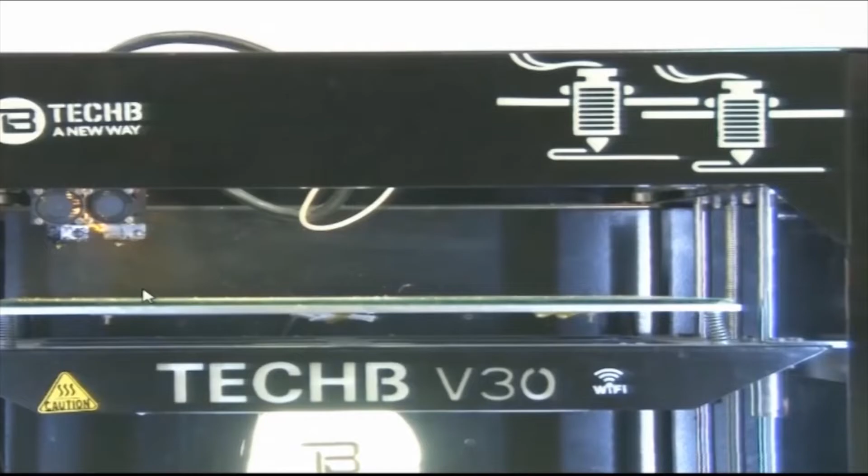In this lecture, we'll take you to the lab for the laboratory demonstration. Now, this process is known as parking. We are parking, like car parking, kind of homing. It is parking the head at the left side, left corner of the machine.

Now, after setting the G code and making all these settings, we are here to prepare the bed for machining, okay, to prepare the bed and to set up all the things like spool, filament. We'll induce filament through the rollers that would come through the extruder, and we'll try to see whether it comes properly or not.

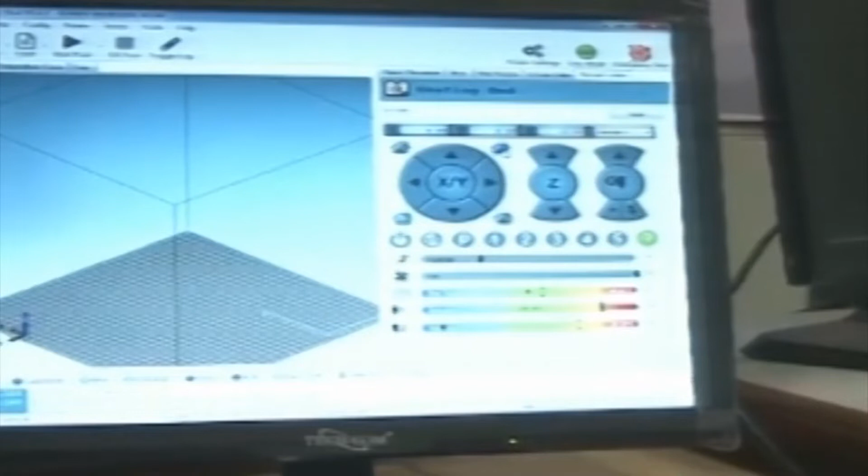Before that, the heating that was done with the commands that we gave is there. The bed is getting hot, it has come close to the temperature that was given, 55 degrees, and the nozzles are close to 230 degrees. So, the temperature is trying to come to this desired input, 230 degrees for the nozzle, 55 degrees for the bed. It will take about 15 minutes. By that time we can prepare the bed.

So, let us start the cleaning and loading and unloading of the material. This is the cutter that is used to cut the filament, if required. This is the tube through which the filament would come through. It provides a proper path to the filament. This tube is attached to the filament head. This is a spatula, which will be used to clean the bed.

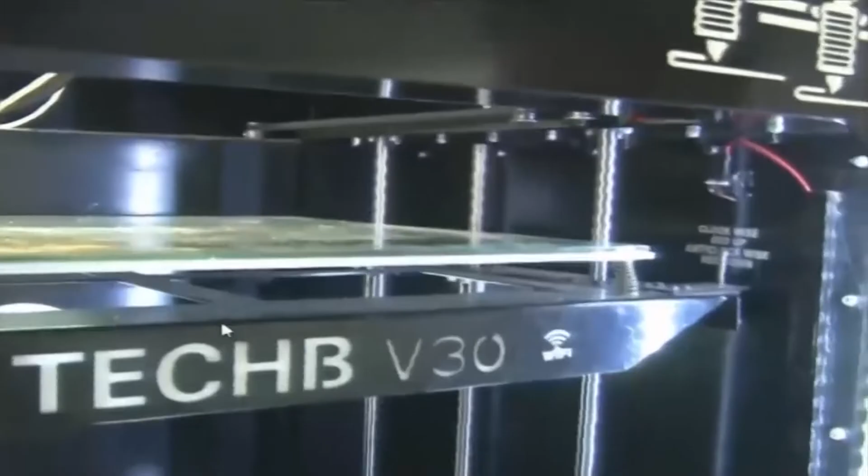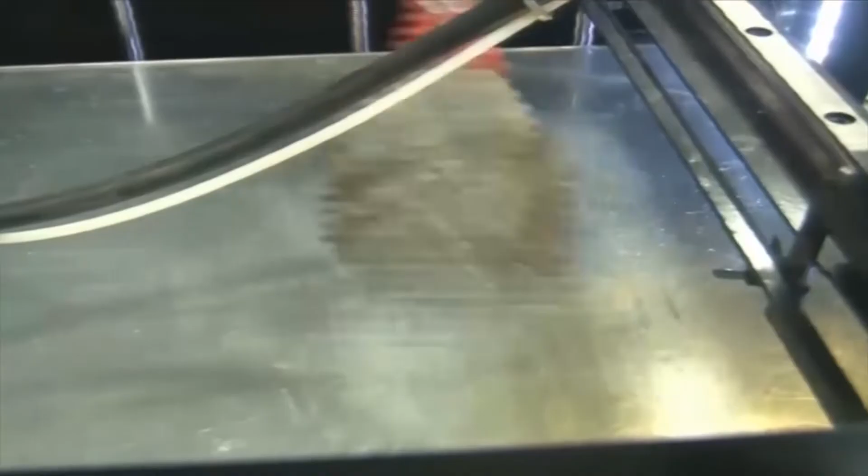So, this is distilled water with a few drops of some cleansing agent. Some of the liquid cleaner is sprayed and it is cleaned with the help of the spatula. The whole machine bed here is actually glass, so we have to be careful.

So, what is this white milky material? It is nothing but Fevicol, the adhesive material we have used. So, we are again applying some more Fevicol. It will help to lock the first layer.

As we said before, we have put our CAD at the center of the envelope. That is why we are preparing the portion that is at the center. So, a thin coat of Fevicol is applied at the center.

Now, this is our head, and there are heaters here that are heating the filament. The filament is coming through this white tube. This is the head that can be moved, so this is our X and Y movement. For the Z movement, the bed is moving up and down; that movement is controlled with the bed.

And there are two nozzles here. Only one nozzle is active at this point of time. So, let us see how to load and unload the filament. This black portion is a PU connector. The PU connector can be screwed in and out.

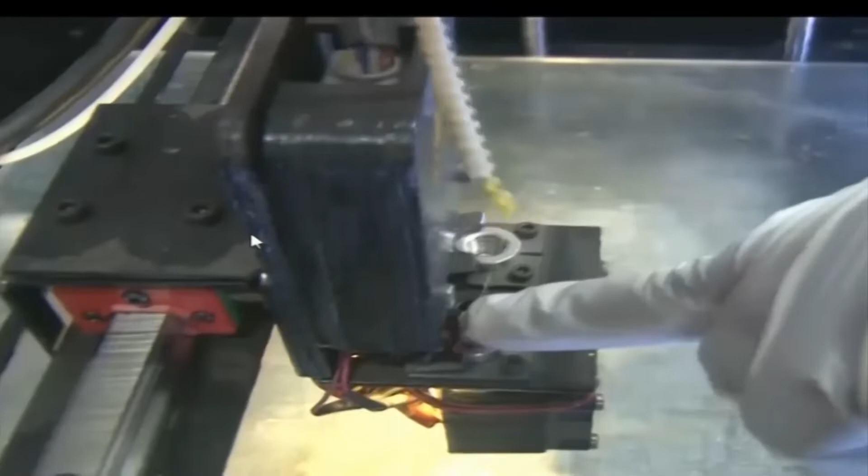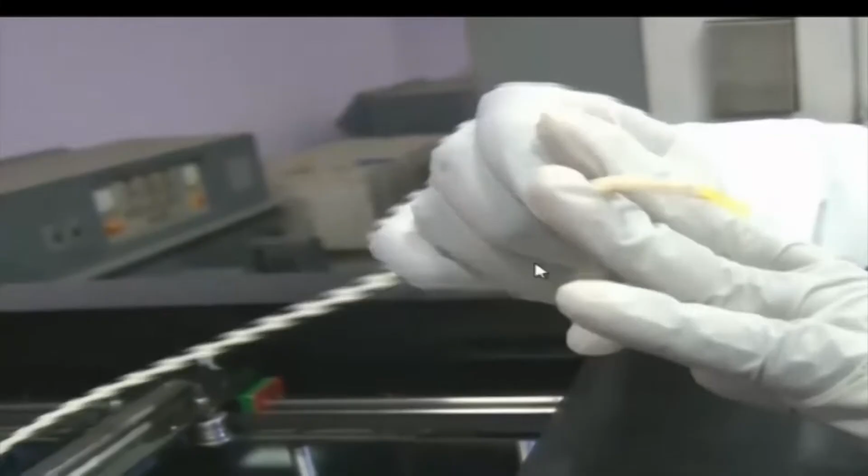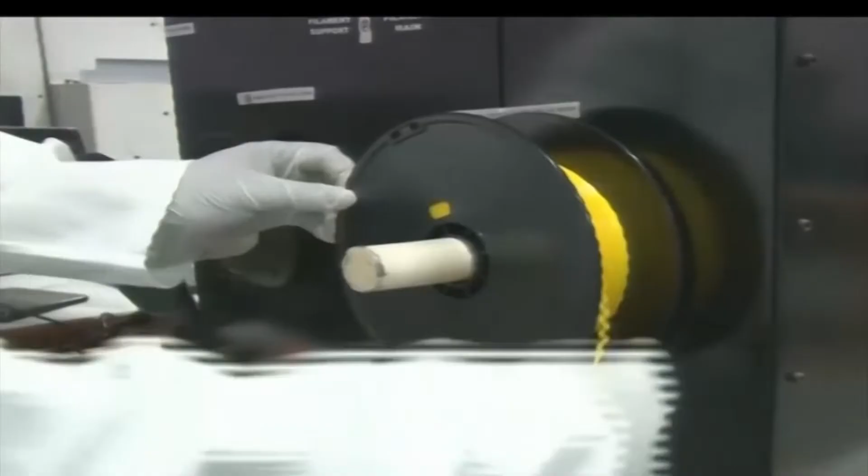So, we have unscrewed it. The PU connector is according to the size of the tube, so the tube would exactly fit into it. These are our rollers; we are taking it off, we are unloading the filament now, you can see. Again, this is the filament of size 1.75 mm.

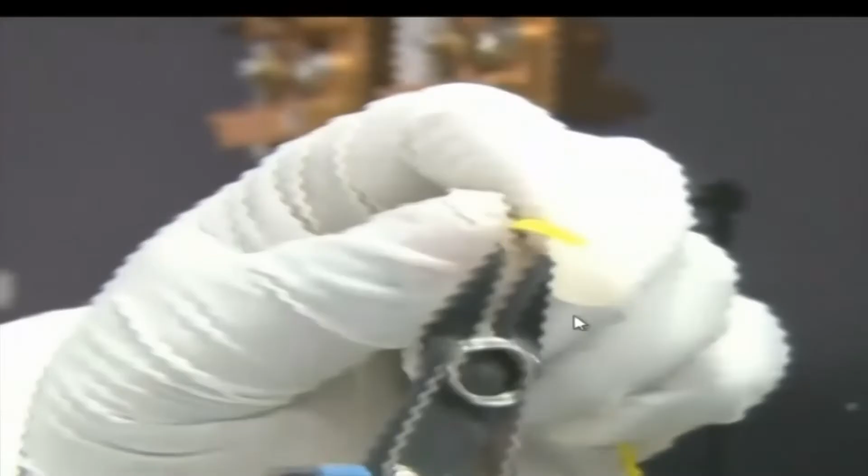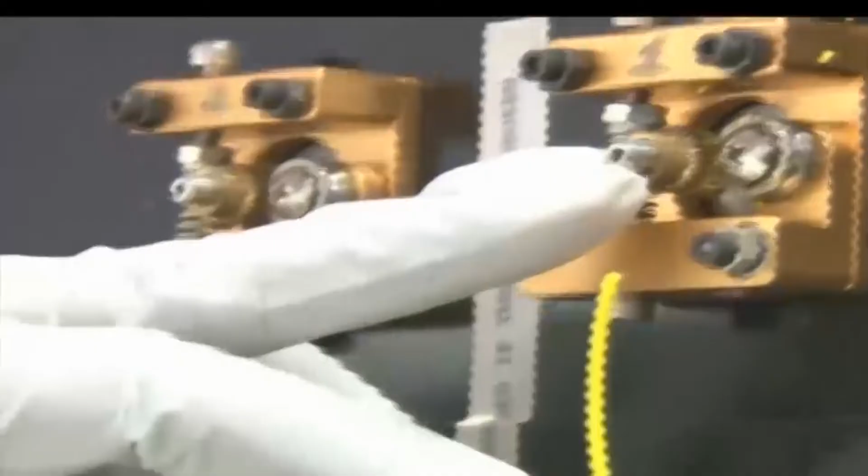Now we can see that the filament is a little distorted at the tip, so it wouldn't enter the rollers properly. The end of the filament is not proper, so we are going to cut it. We have cut it, so it is now flat or square at the end. So this is the roller. This would help to take the filament forward. When this rotates, the filament is carried forward in this upward direction.

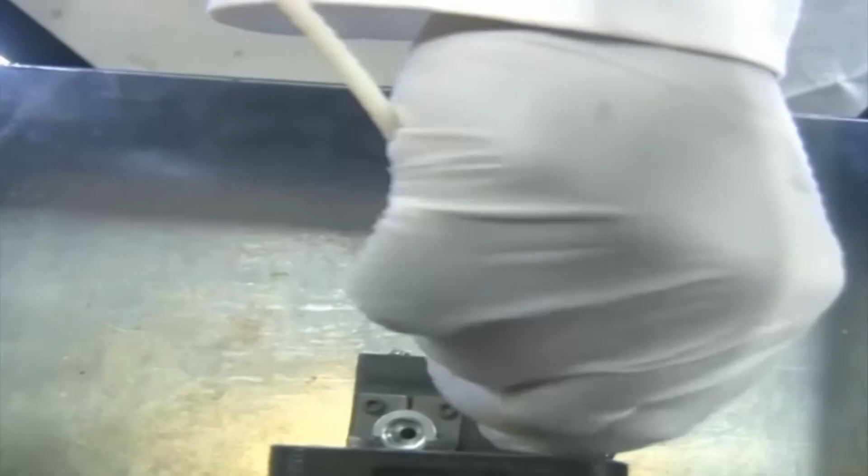Now we are entering the filament into the tube that is connected to the PU connector, and this tube is also according to the diameter of the filament: 1.75 plus allowance, 1.85 mm inner diameter. Now this PU support tube, the filament support tube, is connected to the PU connector.

Now we will see whether it is working properly or not. Now we will lock the PU connector. We have locked the PU connector here. This roller that I mentioned, responsible for feeding, is also known as the feeder. So we are using this pulley and feeder: two rollers, one roller is the pulley, another roller is the feeder.

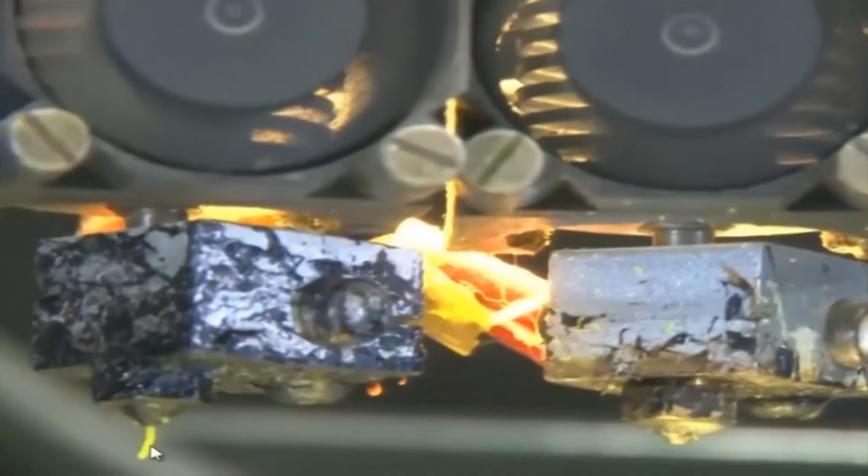We can see that loading of filament is properly done. Now we can see whether the filament is coming through the nozzle or not. Yes, it is coming. Now this means the temperature is now maintained.

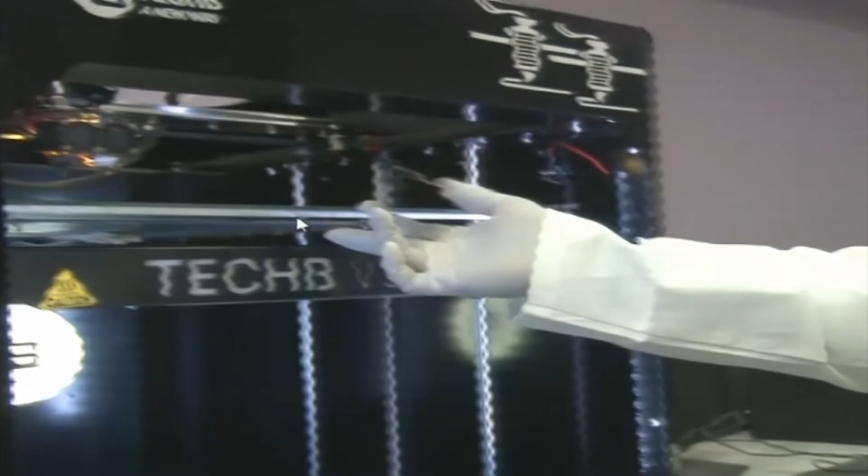Now we will use these two clips to hold the glass with the bed, with the table bed. Okay. So this bed is at the temperature of 50 to 55 degrees centigrade. So to hold them, we use these two clips. We will put clips here and here so that it gets properly over here and at the other diagonal end. Okay, so where are the heaters for the bed?

Now we can go at the bottom of the bed. Let me try. Camera would go at the bottom of the bed. This is the bottom of the bed. There are heaters here. We can see there are heaters attached here. Okay, and the base is aluminium. This bed base is aluminium. There are heaters there, and on the top of the aluminium base, we have put a glass plate on which the actual fabrication would take place.

So one clip is put here, another clip is put on the other side. So everything is in its place now. The temperatures are like we see, filament was coming out of the nozzle. The temperature is close to what we require. Close to means if we have input 230 degrees centigrade, as we know it wouldn't be exactly 230 degrees centigrade all the time. It might vary like 2-3 degrees or 5 degrees variation. But yes, that is the working temperature.

The temperatures are set 230 degrees centigrade for filament, 50 to 55 degrees for table. The loading of the material is there. The rollers are engaged. The two rollers means one is the pulley and the feeder is engaged. Filament is coming properly. The bed is prepared. We have applied Fevistik to make sure that the material sticks there, and the cleaning of the bed is done.

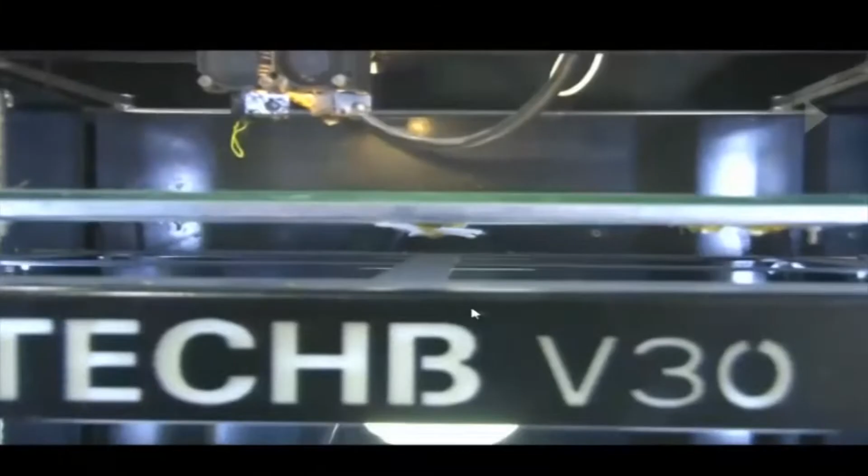So before print preview, we'll just come to manual control here. In manual control, we are going to check manually whether the things are moving. Oh, yes, we are checking the material is coming in, material is coming out. You can see the material is coming out. So we are manually checking whether the feeder is working or not. Okay. So the material is coming out. The extruder is being checked here for its proper setting.

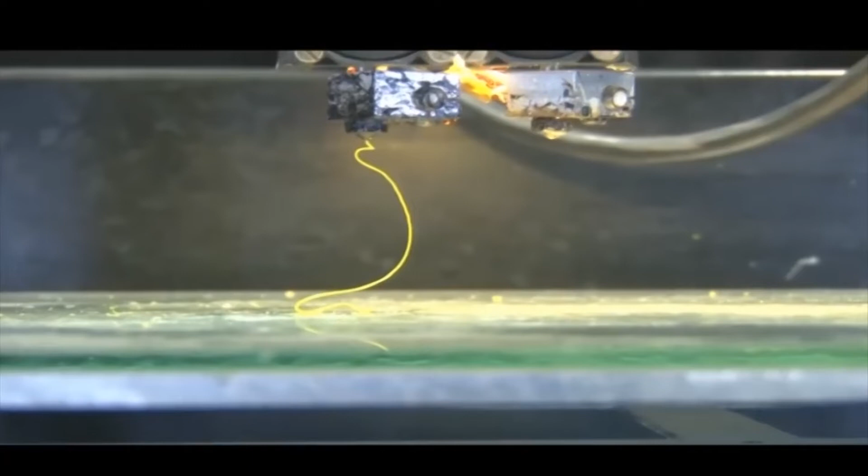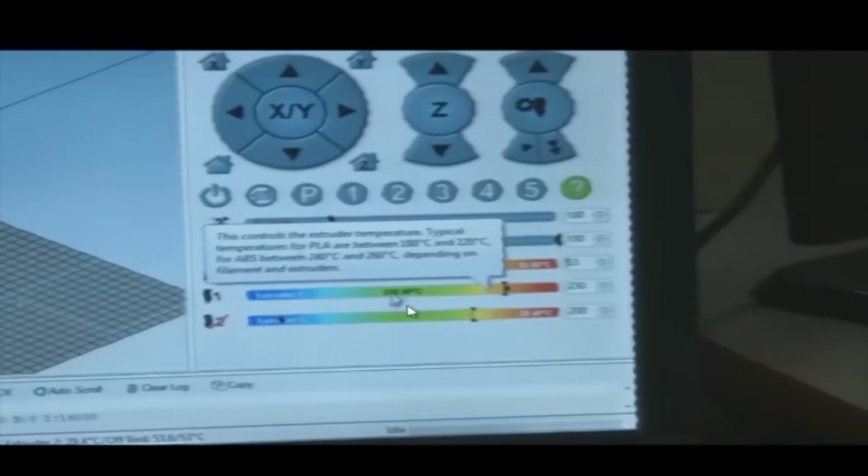Again we can see extruder is activated. In this way we check that everything is quite well or not. Now the temperature is actually 53, 230 degree. Yes, the temperature is 230 degrees for the extruder 1, 53.6 degrees is for the bed. Yes, that means, as I said, 5 degree variation.

I would like to correct myself. This machine is quite precise or sensitive to temperature. So the temperature 53 degree was set. So it is within 1 degree. Like 230, it might be 229 or 231. So within 1 degree of the resolution. So last thing left is we come to print preview and we start the print.

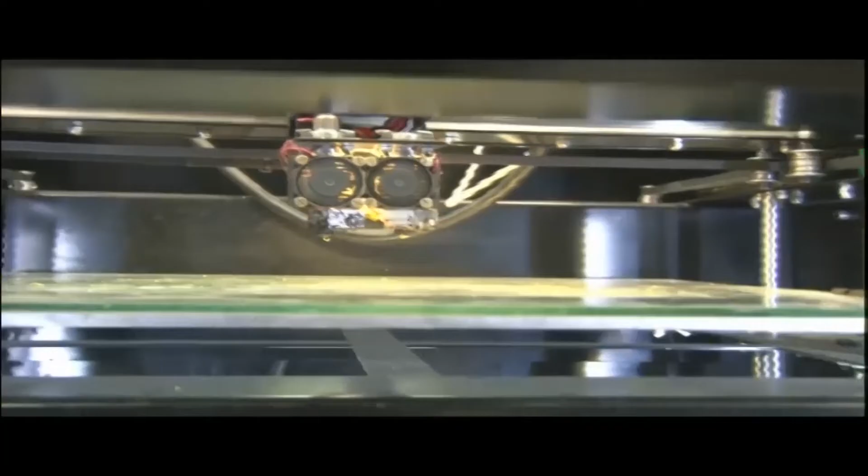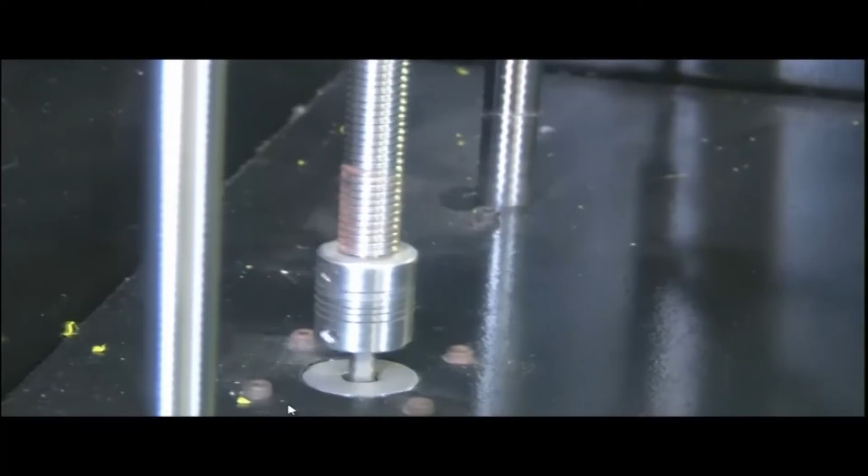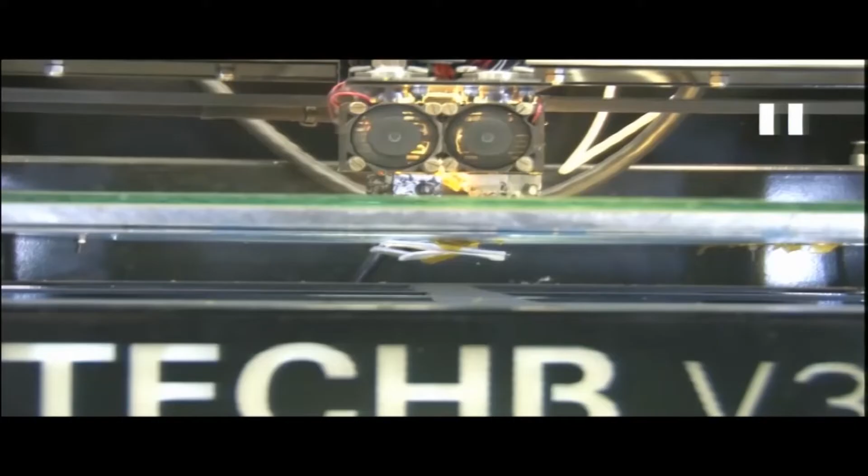Now when we start printing, machine will go and check everything. First it will go and check the parking place, that at the corner. So this is known as referencing. It is checking the height of the job. You can see the rotation. The Z direction is moving up, the table is moving up. Okay. So the bed is trying to touch the nozzle tip, to set the 0 value.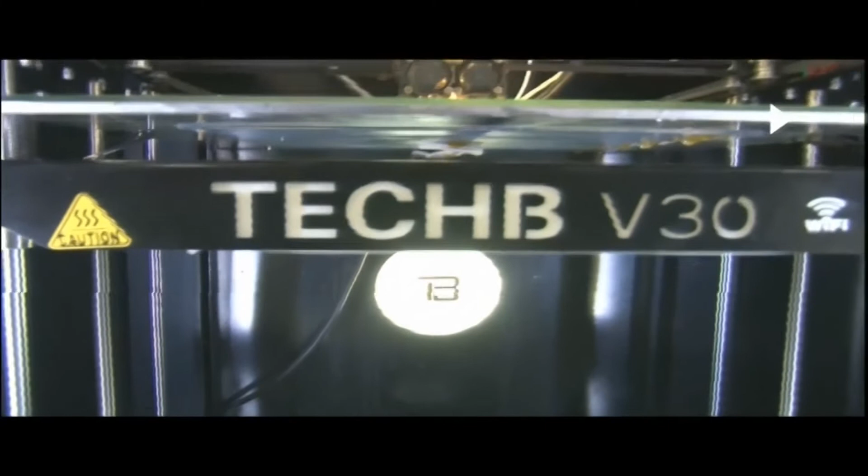Again, you can see the rotation. The bed is moving up in an upward direction, because we do not know what is the thickness of the glass plate that we put on, and also there is a layer of the Fevikwik as well. So the bed would touch the nozzle end to set the 0 value.

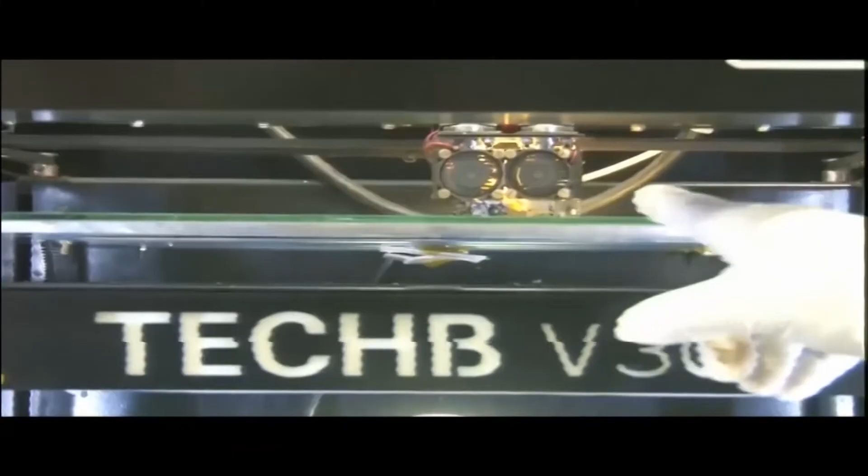Now yes, it has started the printing. The first layer is started here now. It is now printing. This is the brim command that we mentioned before, and brim is being fabricated before the actual model. So this is the very first line that is being drawn by the machine.

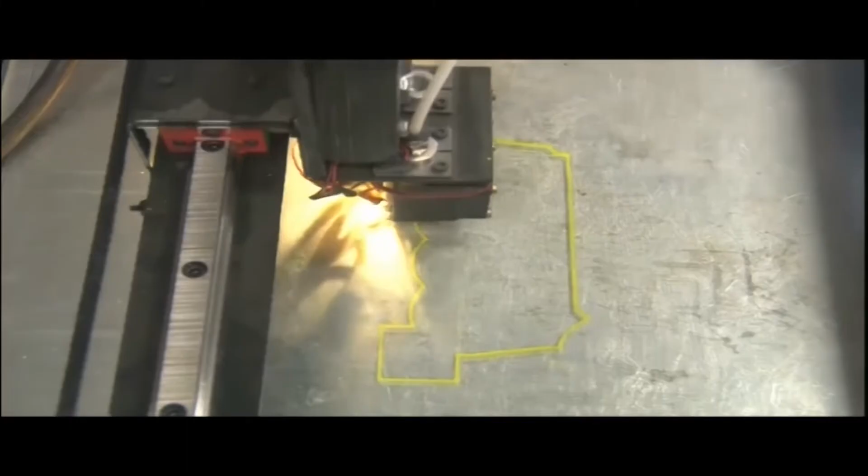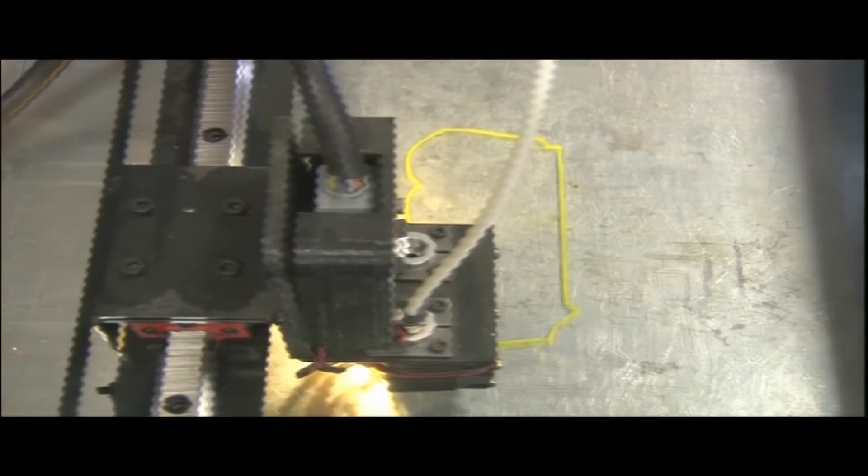So it is running at the speed. So while brim, it is actually the printing only. While printing, the speed of the first layer was 40 millimeters per second. It is moving at this speed.

So this part would stick with the base. Again, brim would stick with the base. This is the extra part. Okay.

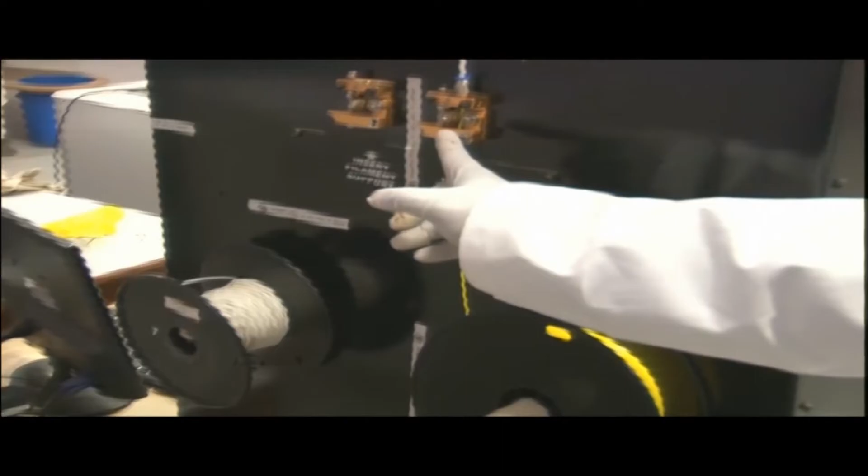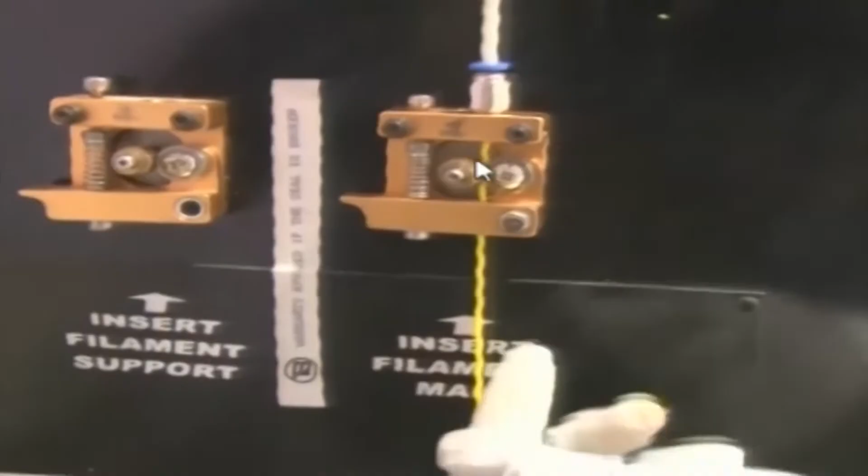Now we can see here how the feeder helps to feed the material. This is the feeder. Feeder is rotating. Okay. This is the roller mechanism here. Pulley and feeder is there. Feeder is rotating to feed the material towards the upward direction. So this is not the part of the CAD, but this is used for the deposition.

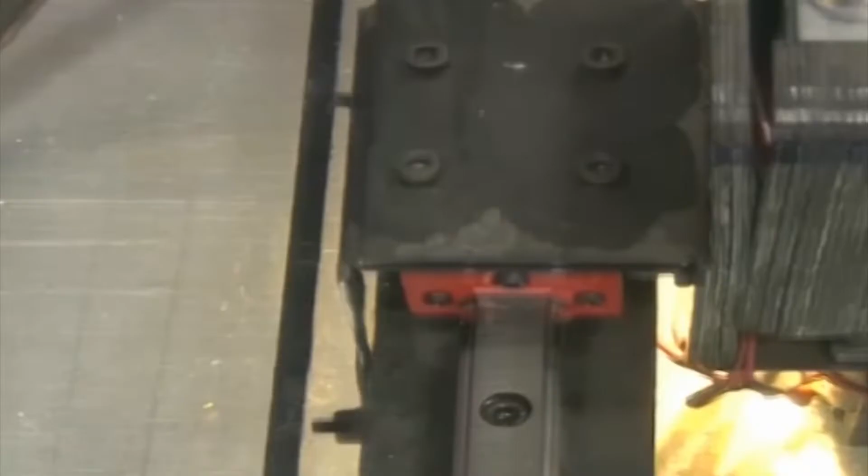So this is how the machining is happening. So it will make the first layer brim, then it will start manufacturing the part. So the time for the machining, if you remember, was 5 hours and a few minutes. It will take this much time.

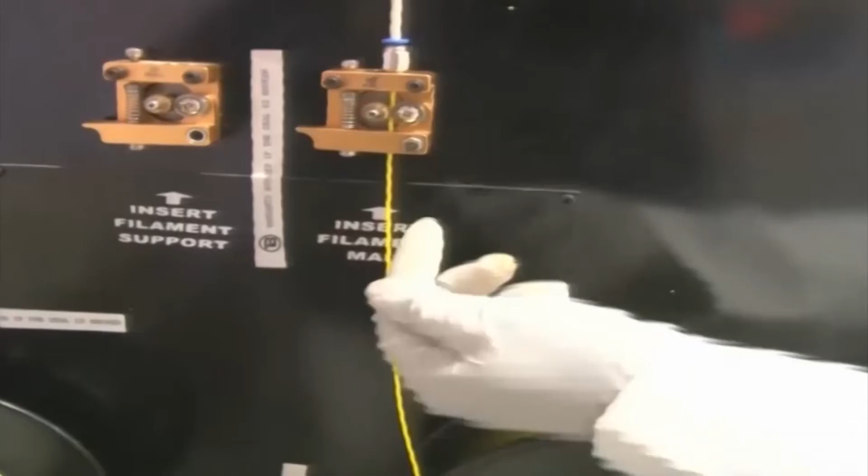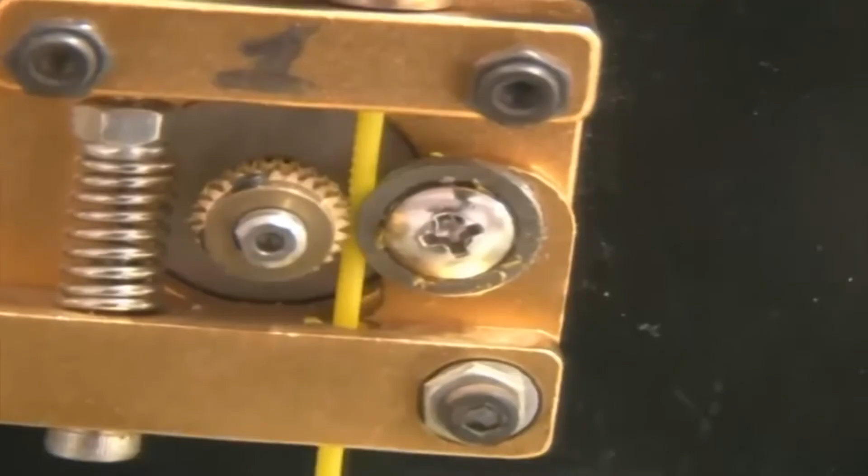So by the time the machining happens, let us try to see the different components here in the manufacturing in the 4i lab. Actually we have to wait for 5 hours to see the final part. So you can see the roller mechanism closely. Okay, this is used for deposition.

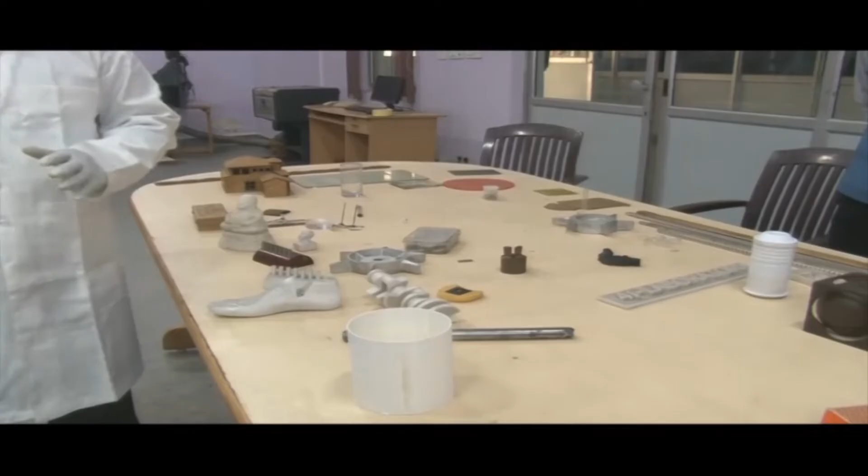So it will take 5 hours for the machining to happen. So by the time, let us try to see the different components in 4i lab which are fabricated using rapid prototyping and other machines as well. Specifically for rapid prototyping, there are certain components. We are going to talk about a few beautiful and important features that we talked about before as well, that are produced using FDM technology, that is fused deposition modeling.

Now with 3D printing, that is this specific machine Tech V30, we have produced this geometric crank. Okay, this is produced with this machine. Now this kind of hollow cylindrical job can also be produced. But this is pipe shaped with lock. Now with the locking device, sometimes we get very challenging kinds of jobs.

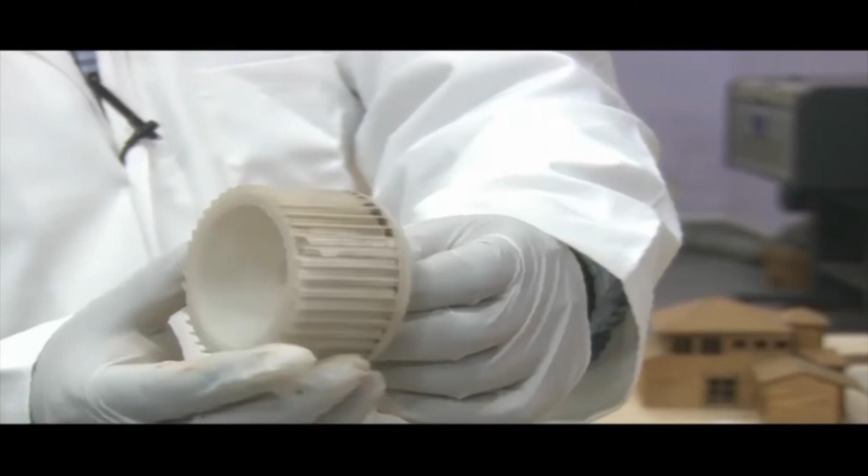For instance, this is a propeller, this is a propeller fan. Okay, so you can see the number of very fine fins here. The gaps between the fins are very small. The angle is very important here. So this is an impeller, it just sucks and throws out the fluid. So here angle is very important. So this is a complicated job. Its fabrication is really complicated, really tough.

So it is tough to fabricate it with any other machining like milling, turning, or the conventional machines, or maybe with CNC general machining. So now this technology FDM helps us to work freely to produce these kinds of parts.

Okay, so in medical sciences, you know we have this foot. We can produce artificial limbs. For instance, left leg, right leg, we have to fabricate artificial limbs for a particular man or lady. If for instance someone has lost his left leg, what we can do, we can just scan his right leg, and using the mirror command we can produce the left leg. So this is an artificial foot that is produced. Okay, it is actually the pattern for the shoe here.

So there are certain other components kept here. For 3D printing, we need to have the scanned model sometimes, or the CAD model has to be there. The CAD model can be produced by an engineer, or it can be a scanned model, which can then be transferred into the CAD model. Okay.

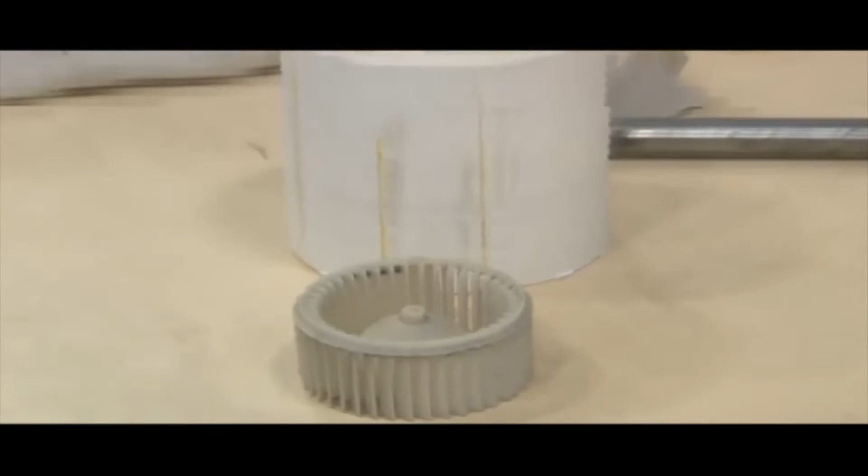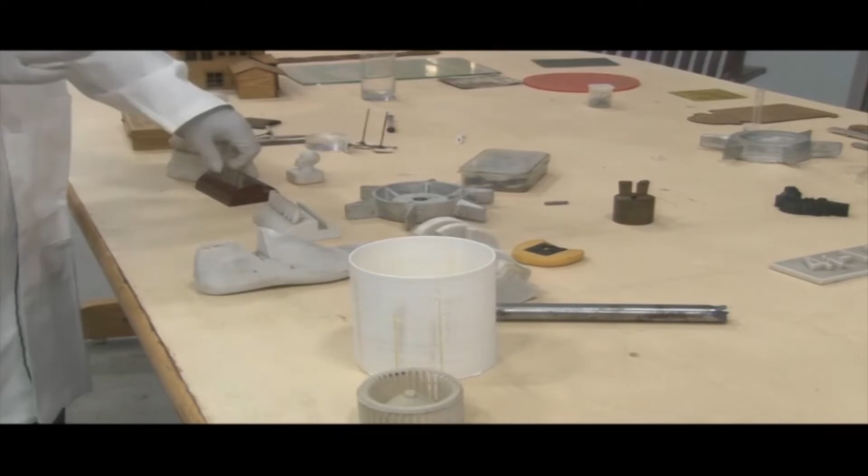So also you can see another model here. This impeller is a beautiful feature. You can see the angle, you can see the accuracy, really very good. So scanning helps in a way that you don't put any extra effort into CAD modeling and designing. The scanning helps in that.

So this is a pen stand, and now if we need to model the same, we can scan it using 3D scanning. 3D scanning means scanning from all the directions, different scanners are there with different degrees of freedom, and we have produced the similar model. So this scanning took about 2 hours, and the printing of this model took about 2 hours.

So 2 hours for scanning and 2 hours for printing. Within 4 hours, we can produce the same product, or we can copy the product. Okay, this is re-engineering, like scanning and producing again. So it was produced at a very fast pace, within 4 hours. That is why this machine is also known as a rapid prototyping machine. We can produce very rapidly, just scanning and producing. That is why the terms rapid prototyping and rapid manufacturing come into play.

Also a few creative items are kept. So this is a complicated model of maybe some holy person. Okay, this is a human skull. So with scanning we can just scan the model and produce it again. Okay.

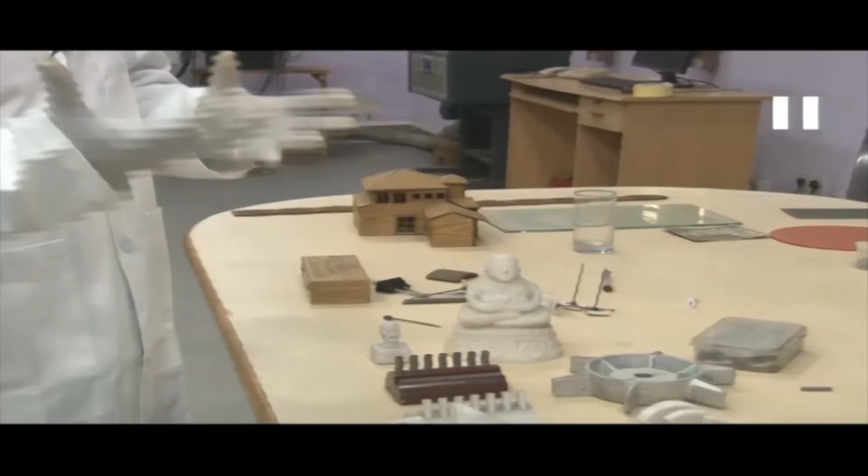So in general CAD we have to draw, we have to input to the machine, and all those things are to be there. The 3D scanning helps. Nowadays 3D is very used in engineering and mechanical background. So 4i lab is a high-tech lab at IIT Kanpur. We deal with this kind of unconventional manufacturing methods. So FDM is quite possible. Rapid prototyping is a very unconventional method of machining.

With 3D printing technology, we can print this kind of creative jobs like this hollow cylinder. Okay, this kind of hollow cylinder. Now the beauty of these two models is that this skull is solid and this is hollow. This is hollow from inside. Okay, this is lightweight and this is solid.

This is quite heavy. And the beauty is that we have scanned and printed them. The interesting thing is that whatever we scanned, we got the components exactly matching the features that were scanned. So there are other machines as well, like CNC milling, CNC turning.

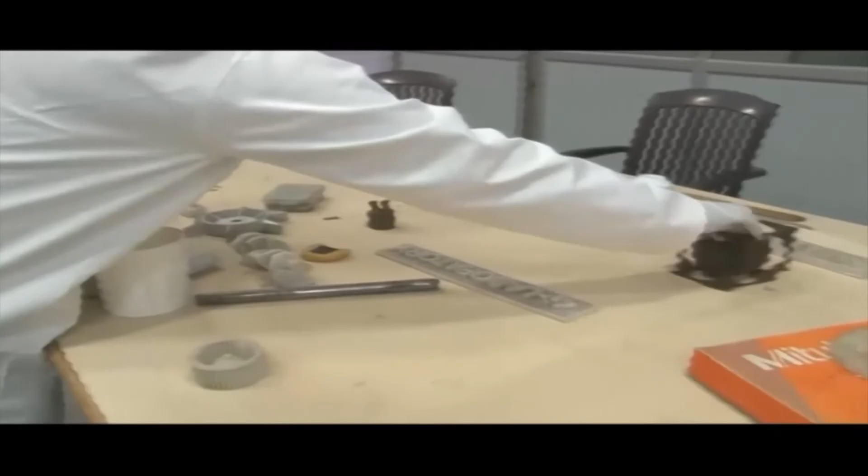So this is a metal part. This is a ball inside a metal cage. Okay, this is not rapid prototyping, but we are just mentioning a few components which are here. It was a cube, and it is machined with a CNC milling machine from all the faces, and a ball is left inside.

So this is an example of subtractive method, not additive manufacturing. So it is subtractive manufacturing with milling. So the same kind of job we can manufacture with 3D printing. Okay, in that case we will have a support and the model materials. You know, now this is happening.

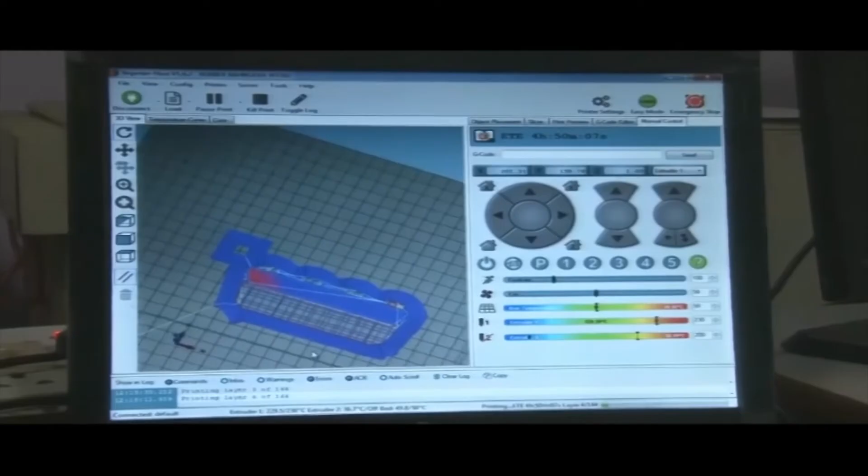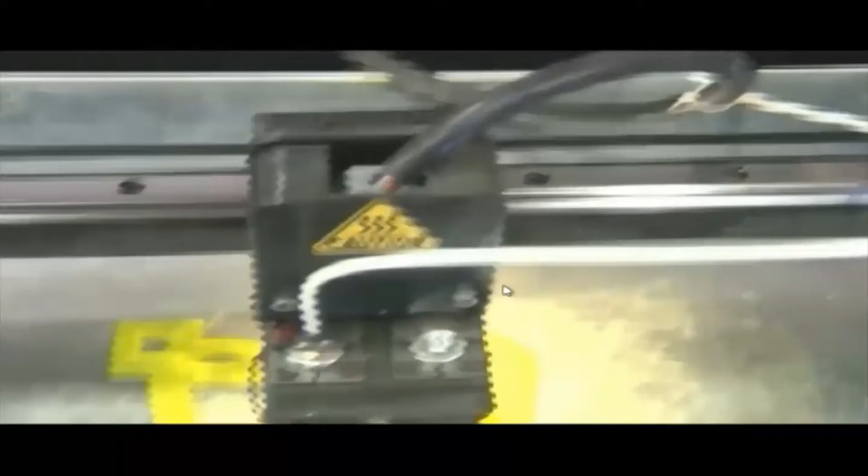This first layer was brim, and after the first layer, the second layer is now being manufactured. Now it is preparing support, you can see. It is preparing support here because there was an angle in the component.

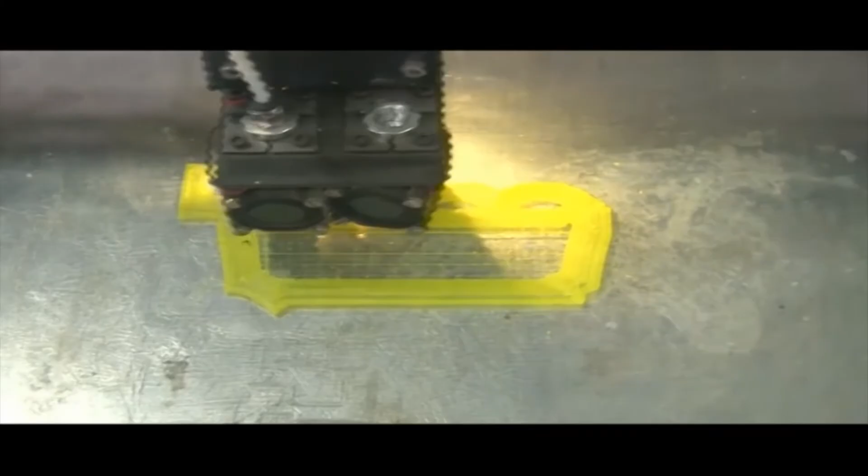Now what is this component? This component is actually a key that is to be kept into the machine. A key that will be inserted and that will lock the two different parts of the assembly. Okay, you can see the machine moving.

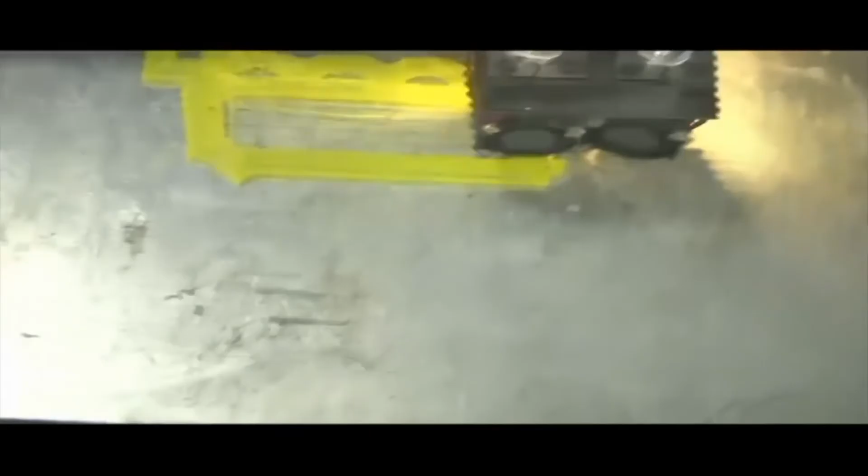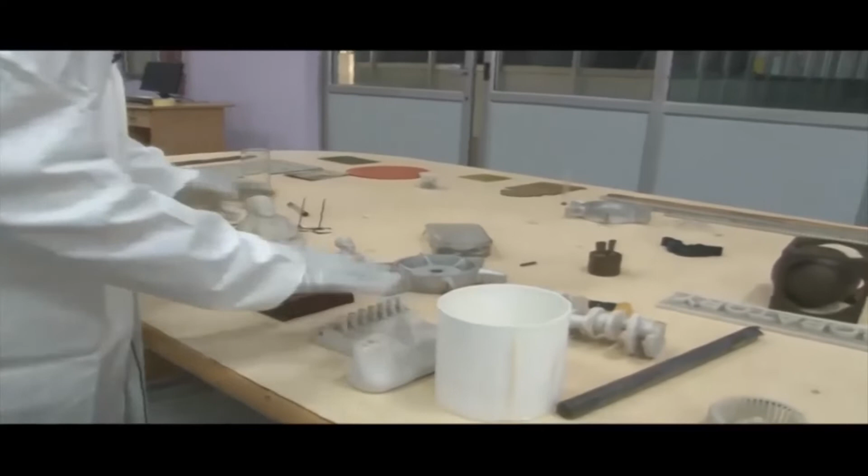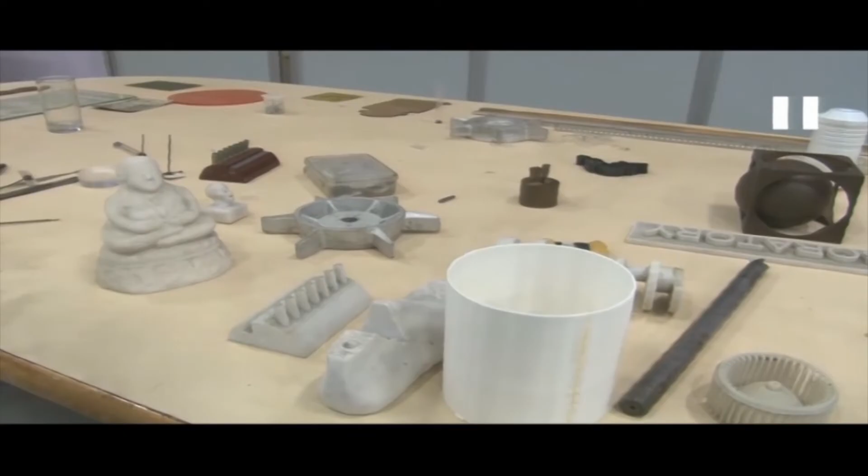So other components are here, like we work in additive manufacturing and subtractive manufacturing both in 4i lab. So we work in both the modes. So let us see the other parts which are manufactured here. See, all these white components are manufactured using 3D printing. Okay. All these white components are from this 3D printing.

This is printing in teak ply, and we print and cut when we assemble. So this is printing and cutting of wood. This is in teak ply. The 3D model is made.

Now this is actually a very old technology. Cut and paste. There was no 3D printing and no advanced machines were there. So this was the way to develop the model. So we had to cut the faces and then assemble it and then fabricate it, but with the help of FDM, we can do this entire shape without putting any effort.

So it can be manufactured directly. And also with the laser machine that we have, we are capable to etch and cut many materials like acrylic, wood, mica, Teflon, and so on. Both things can happen.

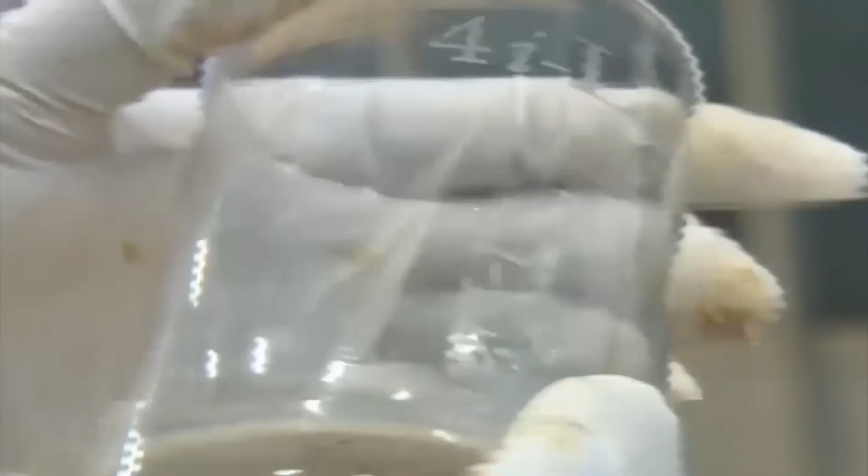So we can print on flat as well as cylindrical shaped jobs. Like on this glass, we have printed the 4i laboratory name and logo, IITK logo. So with this machine, with the roller attachment facility, we can etch, we can print, we can make a mark, we can groove, slot, or any kind of non-contact machining can happen using this machine.

So in general, when we say the word machining, the first thing that comes to mind is there might be some tool, some cutting might happen, contact would be there, scrap would be produced, the tool will deteriorate. But here the laser light comes from the source, it is a non-contact method, the light hits the workpiece surface, and the material burns out, and sometimes it gets evaporated. By means of this non-contact method, etching, printing, cutting, machining take place.

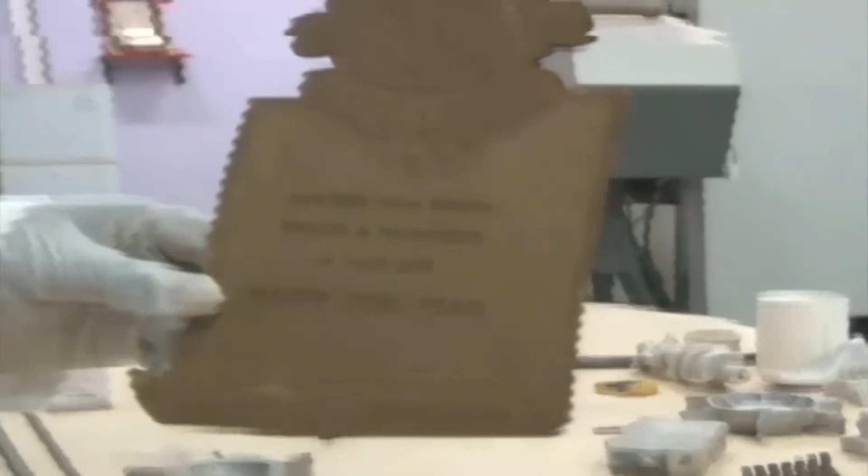Now in this lab, we have a number of machines for cutting and printing. This is cutting and printing on leather. Now this is mica. On mica, printing can happen here, the etching on mica. Then etching on teak ply, again with laser, and cutting is also done with laser in this component.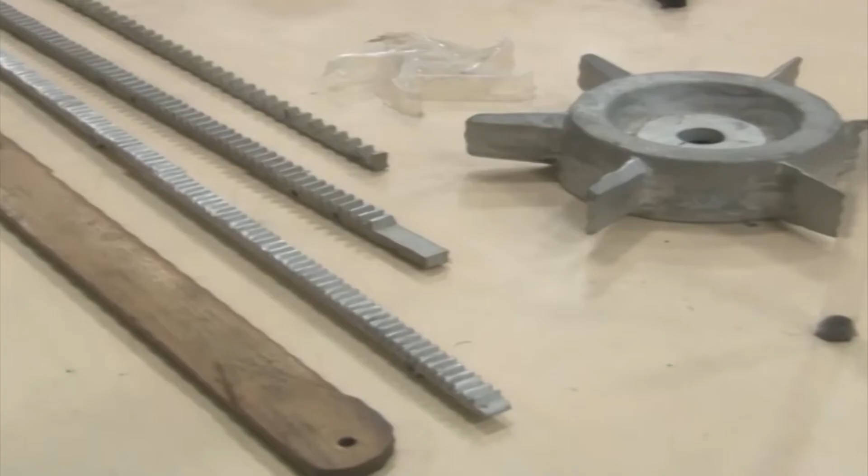Sometimes this kind of cutting is also to be carried out on metals. This is carried out with a machine known as abrasive water jet machining. With the water jet cutting machine, we can cut any metal, any non-metal. We can see this is marble, and this is granite. It is a brittle material to cut.

This is a Chinese dragon shape. It is cut with abrasive water jet machining. This is aluminium, and we cut this rack gear from it. So there is one more job of brass.

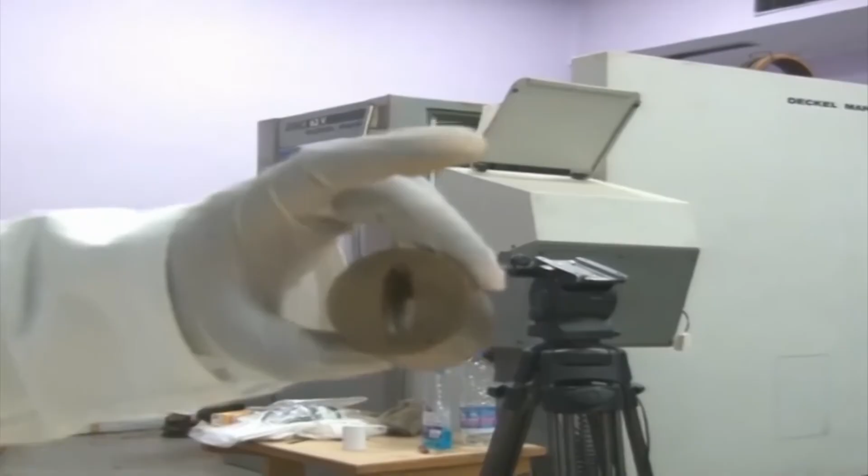This profile is called an aerodynamic profile. Our students at IIT Kanpur are working on high pressure air, and this specific component is used there. So this kind of job is also carried out with a subtractive method of machining, only with a milling machine.

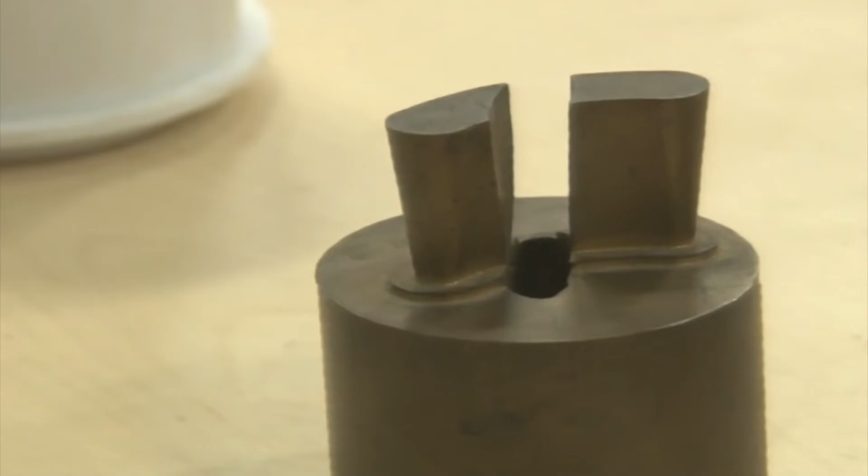So this is not a 3D printed part, that is the outer shell covering of any shape. And this is manufactured using a vacuum forming machine, not with 3D printing. This is one more machine that is able to produce the outer shape covering. It has a specific feature. So this is the vacuum forming machine.

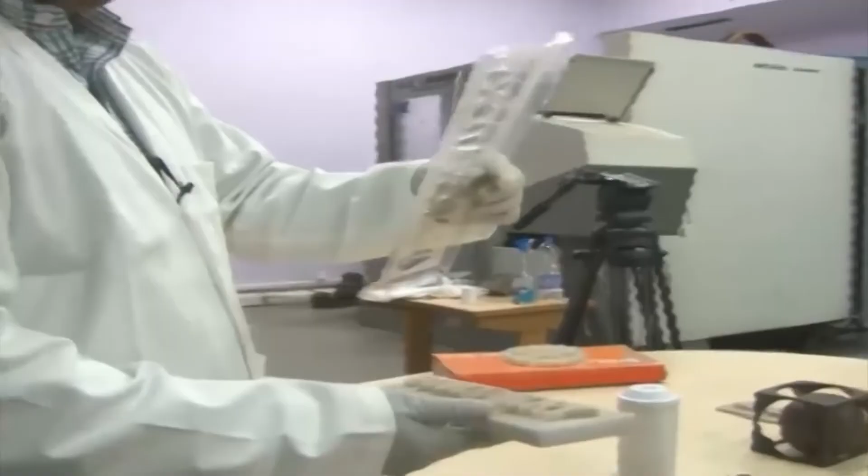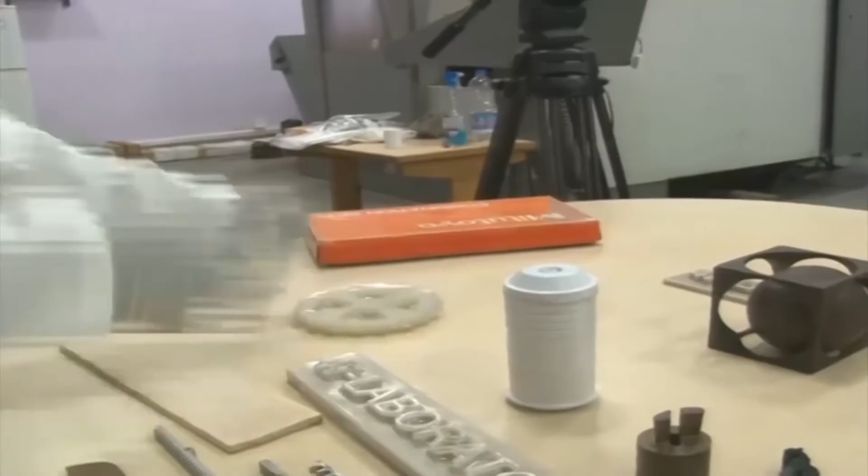With the help of vacuum forming, we can form the sheet into any shape as per our part or a die board. We can make a hollow geometry. As well, in 4i lab we support mechanical as well as electronics. In electronics we have a number of machines to fabricate and manufacture PCBs.

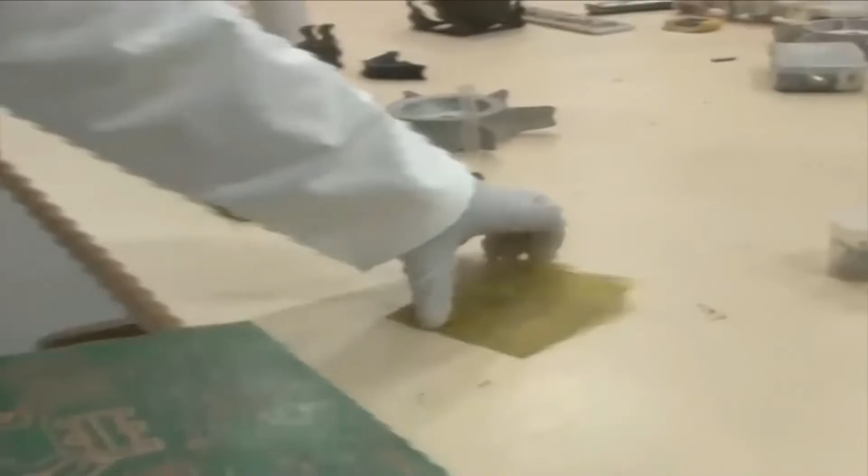This is a printed circuit board. You can see this is raw PCB. These are the tracks. We have etched the material from the yellow area here. This brown one is copper, and then we have a chemical coating to make it green coated, and copper tracks are there. To prevent it from oxidation we use green coating, and the green liquid is here to make it free from oxidation.

This printing of white material here is called tin coating. It prints alphabets and numerics, showing the circuit diagram, the IC numbers that have to be put on, and where the product has to be soldered. So all those symbols for transistors, ICs, earthing, input, output are printed in the white color, that is called tin.

So here we help the students, or the industries that come here, in mechanical as well as in mechatronics, mechanical plus electronics. So we help our students to develop their own prototypes, their own setups and experiments, machineries. BTech project students also we support, and we give classes.

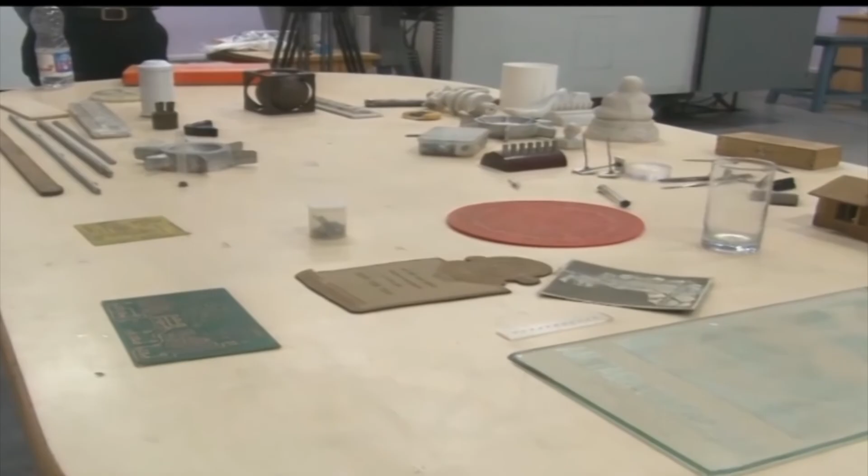We provide training to the people who come here for the faculty development programs. We provide hands-on skill to our students and the guests who come here for learning, and support to fabricate their job. So we especially support people from industries, and all those things are here.

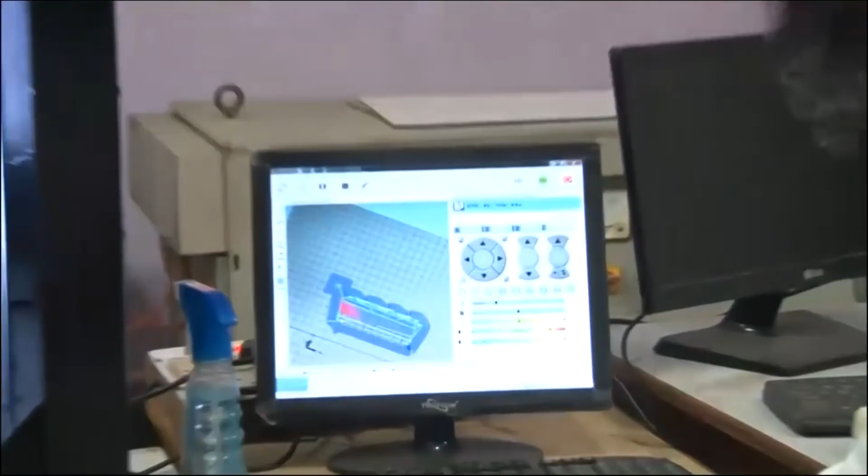So what we can see here is the machine is running. We can see the simulation of the machine as well as the actual machine running here. So the simulation is happening. You will see the material is being deposited here. So all these layers that you can see as mesh here, these are supports. These supports would make the material deposit over it.

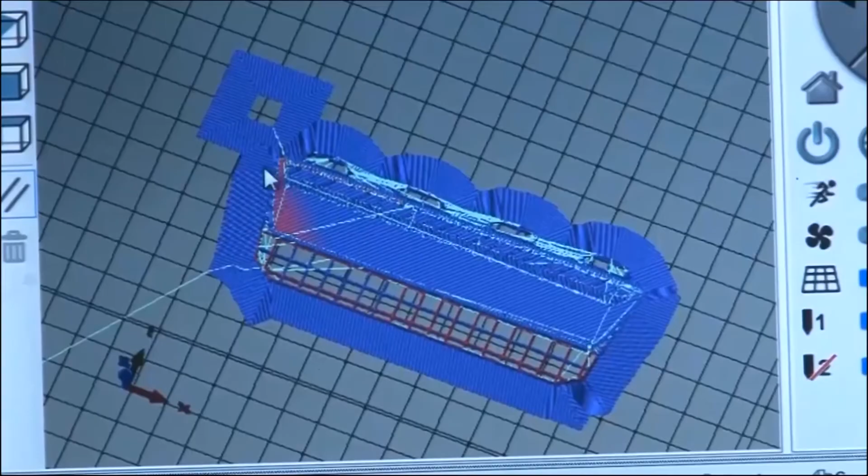So when the machine has completed this side, now it has made one line here. So it wouldn't waste time to restart the machining from this point. When it has done machining here, meaning adding material, it will restart from this point only and keep depositing the material here.

So in total 144 layers would be made to manufacture the part that we have designed, and the estimated time here is 4 hours 32 minutes. That is the total time that is left here. So it has been an hour that we have manufactured this product.

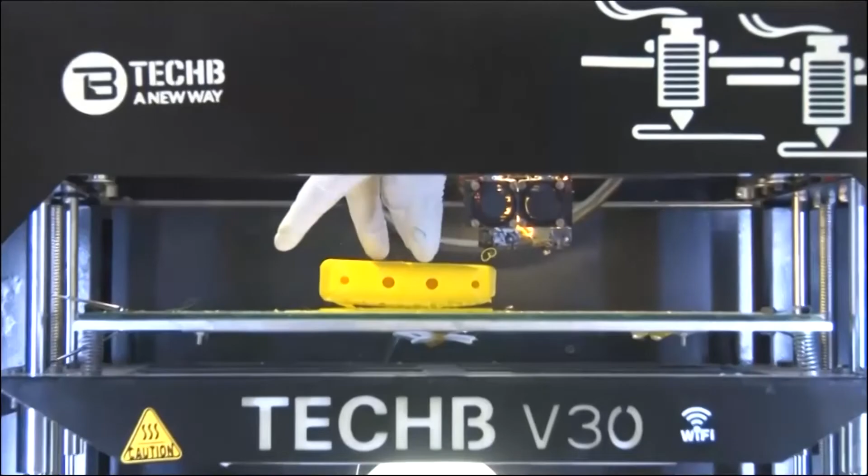So I can pick this product from here. I'll just pick it up. So this part, this support I am removing. So the brim part is there on the machine only. So this is the final product that we have manufactured.

So we can see here that on this support, the complete material is not deposited. It is only the mesh, so the minimum material is deposited that can support the main material. That is the main filler material that is used here. So here, as we are using a single spool, the same material is being used as support and main material.

So these supports, you can see this was the final component that was desired here, the final feature of my component, and this is the support that is removable. So it is hollow from inside. So this is the product that we have manufactured in our demonstration in rapid prototyping, or we also call it additive manufacturing.

So this is the TECHB V30 machine, a fused deposition modeling machine. This is a 3D printing machine. We have multiple additive manufacturing or rapid manufacturing or rapid prototyping technologies like stereolithography, digital light processing. Stereolithography and fused deposition modeling are the major ones.

Then we also have laser methods like selective laser sintering, selective laser melting, electron beam melting, then laminated manufacturing like laminated object manufacturing. All those methods are there. This is a 3D printing machine. Out of the types of 3D printing machines, this uses Cartesian coordinates.